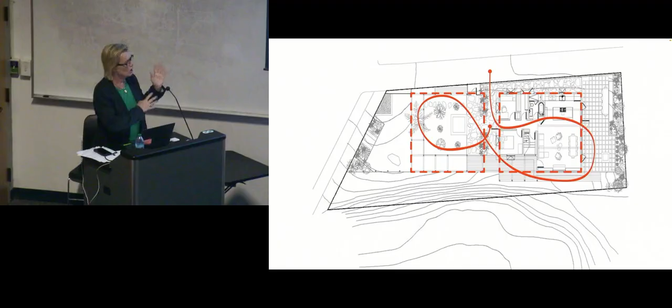The idea of it was just that the garden and the house were doubles of each other. They were the same footprint, and you could circulate in a party, or if you were a kid on a bike, you kind of circulate the same way, in and out of the house. But really, as a story, it ended up getting published a bunch, because at the time it was this, let's say, neo-postmodern something moment, maybe, where the idea of that shape kind of seemed to resonate.

And because of it, I got this amazing book deal to do a book of my choosing, which ended up being a book I worked on about, I would call it the alternative history of modernism in Los Angeles. 20 years ago, people still thought of modern architecture as kind of this Miesian, minimalism exclusively. But actually, the work of, say, Schindler, there's a drawing about Schindler done by Geoff McFetridge, who did the illustrations for the book.

Gregory Ain and a lot of other people in LA were doing these very interesting, weird shapes and sizes, a lot of stuff that inspired Frank Gehry, coming from this previous generation.

So I set out to do a book about the lived experience and alternative expressiveness of modernism in architecture, about the people who lived in the houses and neighborhoods. It was designed by this wonderful team from CalArts, Michael Worthington and others, who were into blasting apart conventions of Swiss modernism and graphic design. So it's super graphic, which at the moment was a thing, different now, maybe more common. That's kind of what started me off.

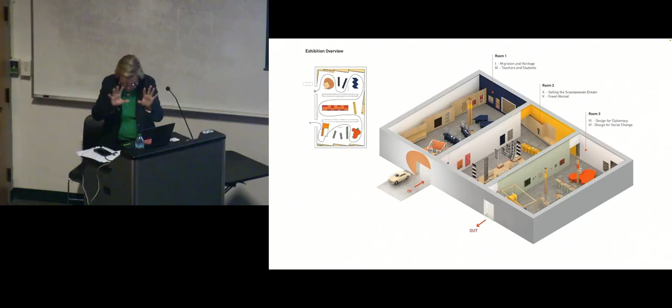They're like little models or some black and white drawings, a little photo here and there. So we wanted to create an immersive experience for people to actually hang out and feel like they were somewhere that they could study the objects more. We went back to the objects themselves to create this palette of color, of shapes, of textures, and materiality that literally became big features within a pretty blank set of 3 rooms in a gallery.

It's in the Renzo Piano BCAM gallery. This is just the stuff of laying it out.

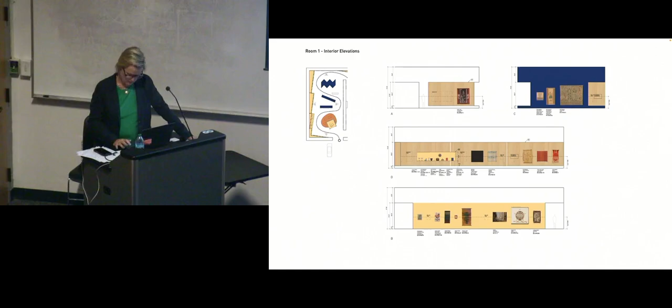The pieces start out with an installation of Greta Grossman's work. She was a Swedish architect in LA who ended up doing all these furniture lines, and her furniture is inside of this piece. That cutout is from the shape of one of her lamps, and then it's wrapped in a Josef Frank map of Manhattan that became a famous textile of Josef Frank. The shape of the platform she's on is also that same shape of that lamp. So even if you didn't notice it, you maybe absorb some of those shapes and colors and stories just from the experience of visiting the exhibit.

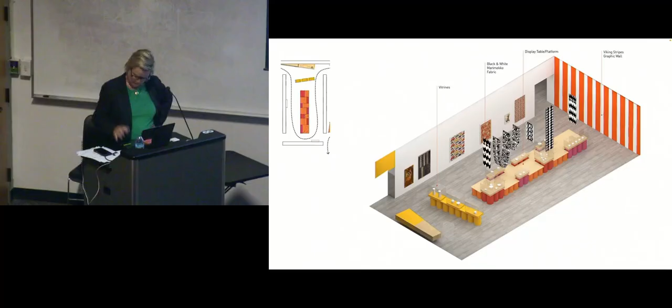This is the Saarinen section. That blue angle is from one of Loja Saarinen's patterns, which is on the wall opposite. The big pieces of wood throughout are kind of indirect Alvar Aalto references to Villa Mairea and others, but also just the wood export of Scandinavia being their primary export. This was an idea about another room that was about the marketing of Scandinavian work, setting it up almost like a Viking ship of products, with the Marimekko sails.

Anyhow, you can see also these are those same Sonotubes that were used in the LA Olympics. They had given us the freedom to make our installation of the show, which traveled around the world, like very LA specific, so we were kind of taking the LA way of doing that. A lot of, for me, context is really a big issue in terms of what associations you can get your multiple readers or multiple viewers to experience.

So that's that show. Along those lines, using relatively inexpensive means, color and pattern and maybe shapes that aren't too elaborate, we did an adaptive reuse of a factory building in Los Angeles for the Silverlake Conservatory of Music, which was a music school started by Flea of the Red Hot Chili Peppers and is an after-school music program and summer camp that's hoping to fill the gap of the underfunding of music education in LA. They had for a long time this little tiny space down the street, and it was actually in that Bohemian Modern book, which is kind of how I got to meet this gang.

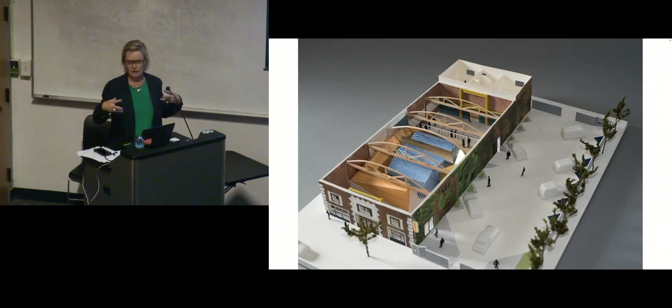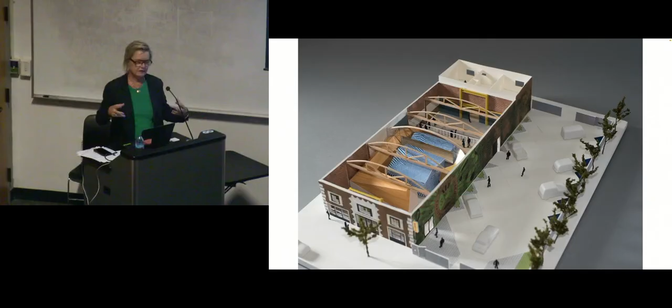So they wanted to—we took out the front and added all these windows and openings, but then it's like a lobby here in the front, a very informal, low-key lobby for parents and teachers and stuff to hang out in, and then it turns into a little village for students. So this is that lobby, and then there's a kind of...

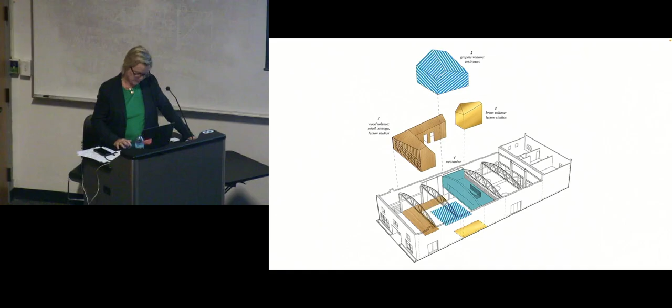A set of practice rooms, where all the classes are, like little rehearsal rooms set up in a kind of Dr. Caligari-esque little streetscape for students to walk around, sort of scaled to the kid. And then in the middle of it all, we have a pretty big assembly space, and our codes require a huge, ridiculous amount of bathrooms as a result. We didn't want to choke off the connection between the school and the assembly space.

So that continues to be a really great community space. It's actually where I met another client from another event there.

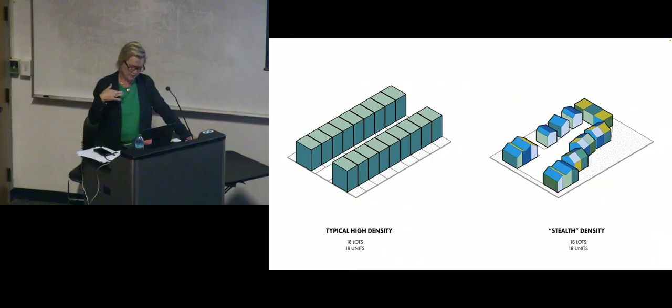We were asked to do something more appropriate to the site, which is in Echo Park on a very complicated hillside. We came up with this idea on the right that helped break it into pieces, where instead of looking like 18 separate little boxes, it was kind of a community of 8 or 9 houses, or 8 or 9 buildings.

So many of the houses, things that look like houses, are actually 2 or 3 full houses disguised in the shape of one. I was calling that idea stealth density. It's also built around a landscape courtyard - a very designed courtyard that is where the parking is, but is also the space of community. All the units face into that space, but they also have front and back yards.

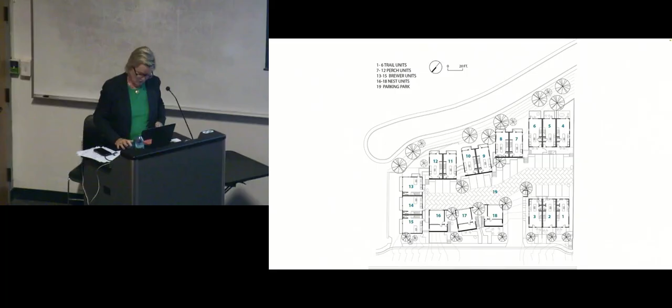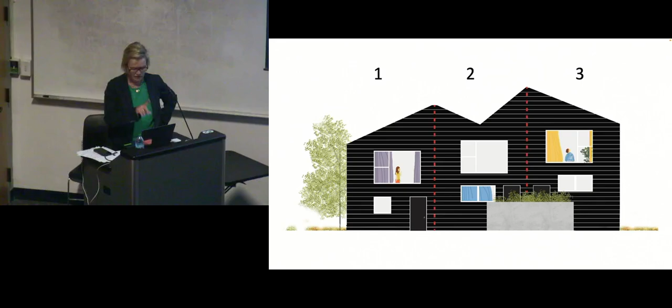So these are some rough models, Iwan Baan pictures, showing the Richard Scarry-ish version of life there. This is a triplex - 3 houses that have a 6-inch space between them, and then a roof that appears to continue, but they're actually separated by gaps.

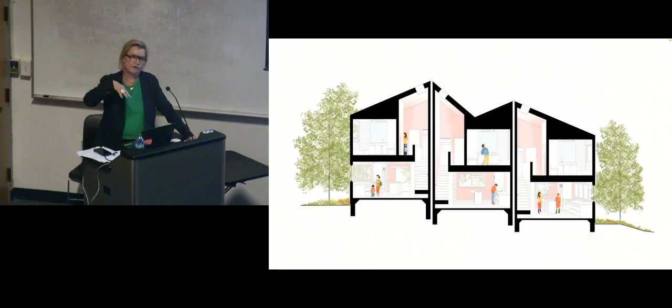The other thing is that by using that kind of shape, leaning into the gable world, it allowed us to create a lot of different sections that really increase the spatial differences and breathability of these buildings - much higher ceilings in the staircases with indirect light, and different ceiling heights in the bedrooms accordingly, hugging the sites.

This is a staircase that's also an office and also a laundry room. We used these big industrial window types - I think we saved like $490,000 on the original bids by switching to full-on storefront systems, which made it waterproof but gave you these much bigger expanses of glass. Pretty good for the views.

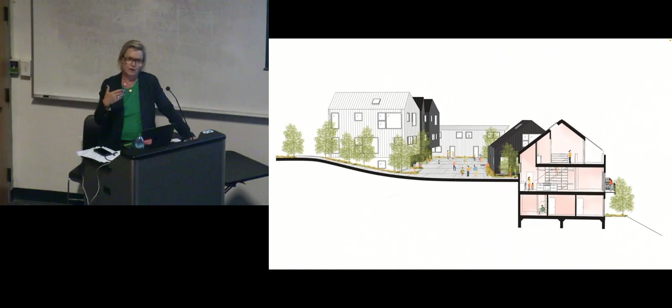There's also two different types of materials - some of them are fiber cement board painted black, some are standing seam metal and white kynar. That language between them helps make it feel like more of a set of unique things rather than just a mono concept project.

There's a couple of single family houses in it too. One architecture critic kept calling it the emoji face buildings because of this stuff, which is true, I guess.

It kind of goes from site to site. They're also staggered so that you can always see above the other ones, and everybody gets these pretty great views of downtown. This is all grown in now with trees and things, but I have no updated pictures.

The really fun thing for me was that in terms of building a community that fit into the larger context, people in this small community have started having communal parties and dinner parties, and that central courtyard has been getting used for other purposes than parking - that was always the sort of Dutch and Japanese idea of parking that's also other things and adds to community building.

Along those lines, in terms of ideas for housing, which maybe are somewhat specific to LA, but we have a housing crisis, you may have heard. There was a competition about smaller scale density, or medium density, low rise it was called.

I thought I would do a project on a site I know really well in Frogtown, where I did my thesis when I was younger - a piece of land next to the LA River that had small worker housing on very, very skinny but deep lots.

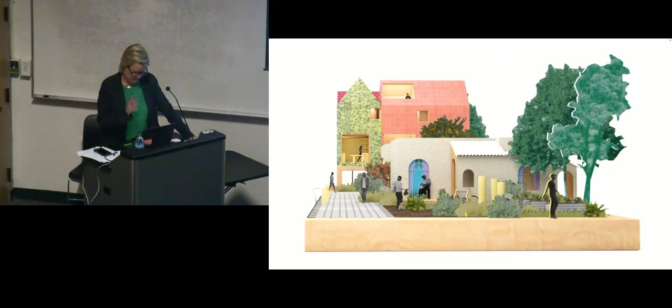So this is the bigger concept of how that might go, and this is an illustration of our idea, which is really 4 almost Blackbird-y projects grouped together around a central core, and also set down in the ground for passive cooling as well as height.

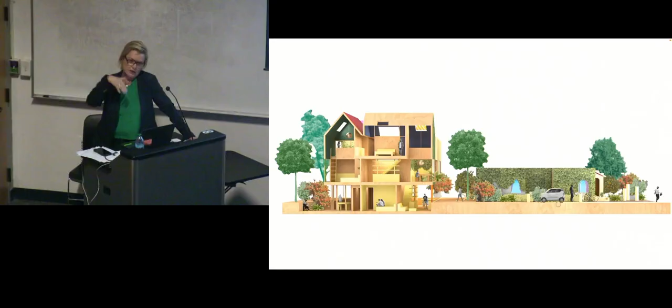So we made these winding, multiple stairs that were kind of winding up through the middle, and that's also acting as a ventilation stack for natural cooling.

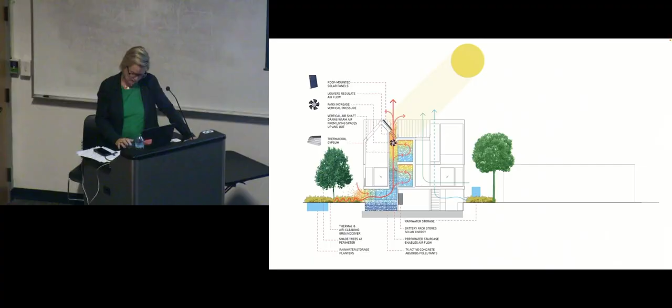There's a fun model. On the other scale, we did another project that was also hypothetical for much denser housing. Another thing about Los Angeles is that we haven't really built a new street since 1992 in Playa Vista, because our planning department is maybe not the center of progressive planning, I would say.

So we took this site that used to be train yards - right now it's housing, was sold and not bought by the city like 20 years ago - and now it's just a bunch of FedEx warehouses and warehouse buildings and a sea of parking.

So the idea was to heal that wound and use this idea of stacking the commercial parts of it, which are really vital for the tax base of a community, vertically, and then leaving the rest open for housing. That's kind of what these diagrams are.

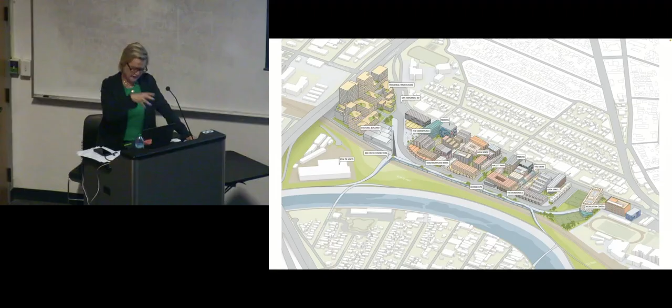Just imagining what that might look like. I was a little bit interested in Eliel Saarinen's ideas for Helsinki, which are quite an amazing set of drawings - would you care to check it out? They have the European block idea, but also in this case there's these sort of separated parking stacks, so we were drawing different ideas around that.

Here are some renderings. So all the higher bits are stepped back from the street, so there's a streetscape that connects to those parks.

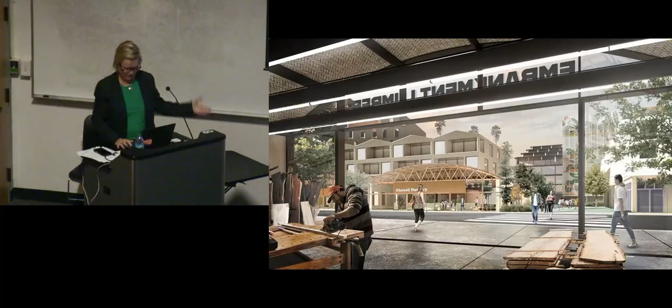And then, let's see.

So beyond housing, I guess the way that Blackbird has that concept of stealth density and hiding things, I think it's really great to be able to find a concept that's readable to your average person, not just architects, in terms of why something is what it is.

So one of the projects I had recently, an ongoing project, is working with Sunnylands, which is a big famous compound in Rancho Mirage in the desert, designed by A. Quincy Jones in the late 60s for Walter Annenberg. It's like where Obama goes golfing—it's the Camp David of the West Coast, basically. They use it for political retreats.

This is the main house that was done by A. Quincy Jones, and it's now sort of a museum, but it's also where they have these retreat functions. A. Quincy Jones was toward the end of his career, and he got a little bit arm-wrestled into having to make everything pink by the owners.

But they had also all been spending time in Mexico. This is right when the amazing anthropology museum in Mexico City was done, and there was a bit of a craze. So there's a lot of stuff around Rancho Mirage that's inspired by late 60s modernist Mexico that translated into Palm Springs, painted pink. There's a whole thing around shapes and forms—this literally is a pyramid taken from that.

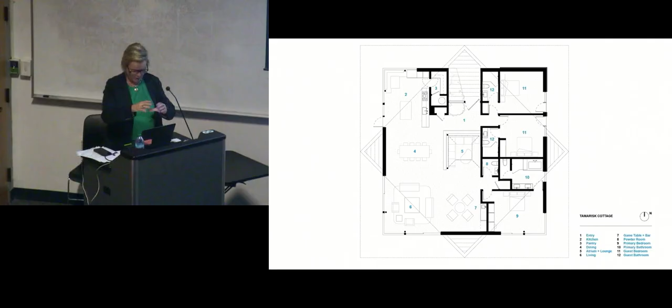So let me just get to the project. This is the framing of that project—these huge overhangs, the underside of which is going to be painted pink, and the top of which is reflective white.

But the concept really drives the project, obviously, and it got connected to this other structure behind it, which is a swimming pool and pavilion done by Fred Fisher recently.

So this is our building, recently finished, not yet properly landscaped. And this is the context of Rancho Mirage, which is near where the Indian Wells tennis thing is, if you know that kind of thing. And this is the house—I think this is a rendering, but there are pictures too.

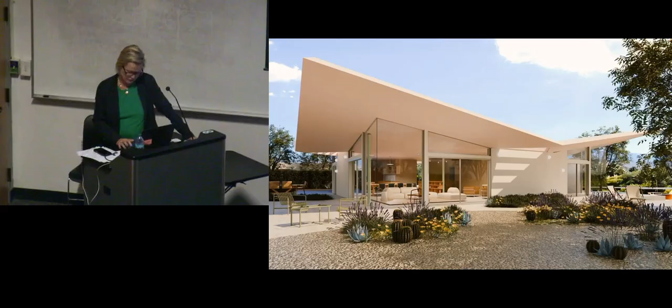Landscape is a big part of this because it's very indoor-outdoor. If you've been to Palm Springs, there's a famous Albert Frey building that was, I think, a gas station—now it's the tourist information center. I always loved the daringness of those giant overhangs, and I didn't know if you could get away with doing it, but you can, by the way.

It's not the hardest thing, and we had to chamfer the edges with these extra bits to get that line to thin out and read in a disappearing way.

Say no more. We also, in the middle—the famous thing in the Quincy Jones building is that it has this big atrium in the middle that's kind of great, with weird plants in it and these pink columns. So we took tropes from that, like the pink columns relating to it. We made an atrium, although it's actually got a skylight on it, and it becomes this little corner built-in nook.

Looking through that window, we actually see Quincy Jones's own studio, which previously had been an addition to the ranch house that used to be there. So that was one of these sort of high concept moments, but then, of course, most of the decisions are more about the architecture itself or the project itself.

Another project in Silver Lake is a house next to this house. Originally, it was an addition to this house. This is a Raphael Soriano from 1936, in the heyday of streamlined modern meets high modernism. It's an extruded kind of boat shape with this really great round window for a piano, and our site now is where that arrow is. So we wanted to keep that view clear, but we also were looking for kind of a language for this house.

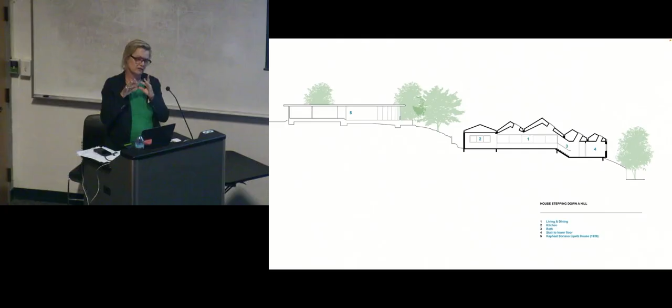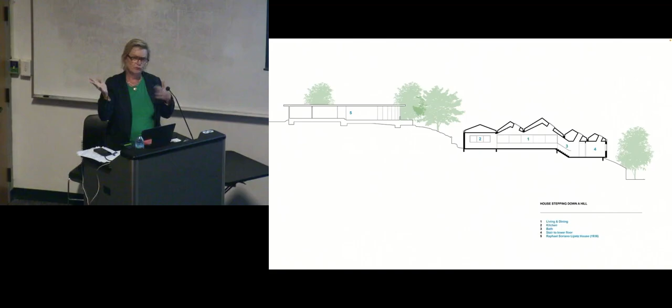Also something new in my bag of tricks in terms of stealthiness, I guess, is starting to use scissor trusses. They're an amazing way to save a lot of money on the framing, but they also let you do any kind of shape on the inside that's not necessarily related to the outside. So you could have crazy shapes on the inside, a very simple outside, but you can also get all your gear, your HVAC, et cetera, running through it. And they go up in about a day, so you frame your whole roof very quickly. It's actually very economical, but also very custom.

I was working on Silvertop at the time, the Lautner House, and I called this the poor man's Silvertop. So all kinds of strategies around wood framing.

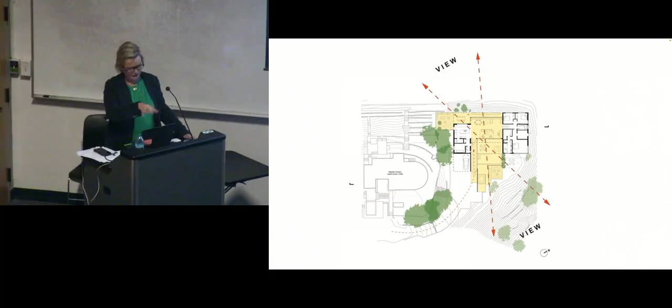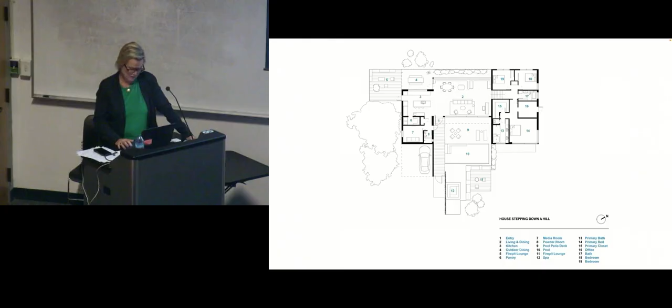This is that house itself, sitting below their house. It also has these views in both ways, one towards the ocean, one towards the mountains. The big goal was to keep the main floor pretty much open as a sort of pavilion zone, so it could feel like a pavilion with these views, and also steps down the hill for outdoor functions. This isn't really showing the scissor trusses well, but the next picture shows the scissor trusses inside. Look them up.

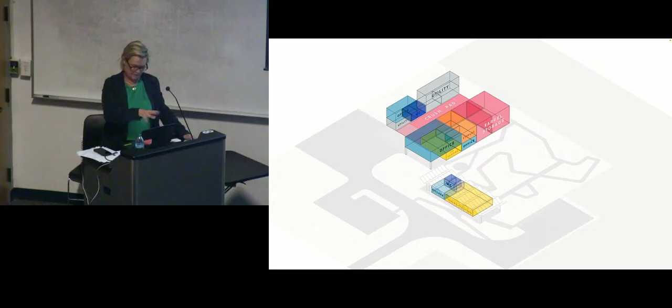This is that tasting room, separated stage. It's incredibly hot in Napa Valley a lot of times. You actually need these shade structures, and you have sprinklers in them and so on, so you can kind of constantly cool off outdoors. Our landscape.

This is that altered, sort of prefab, very inexpensive metal building with some alterations as a crush pad in it, for wine storage. And underneath it is a sort of VIP lounge tucked inside and outside. There's a lot of events at these wineries.

And yeah, it's been super successful actually. It's one of the big new wineries in town because the owner also wanted to have younger people interested in going there, to give it a more with-it atmosphere.

So a new project we're doing that really gets going in January is for this artist, Lauren Halsey, who has a nonprofit called Summaeverythang. She's famous, maybe you know her project on the rooftop of the Met a couple of years ago, which was this monument, almost an Egyptian monument to her neighborhood in South Central, but done in these giant white panels. That's actually getting installed right now in LA on a public site.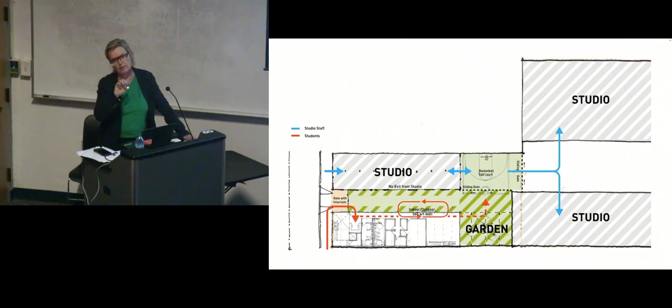So we're building a structure that also has a big garden oasis, but it inhabits a little bit of the existing building, and then we cut it off and build our new larger structure behind it. The idea is to have a big public space as well as classrooms for art, music, and technology.

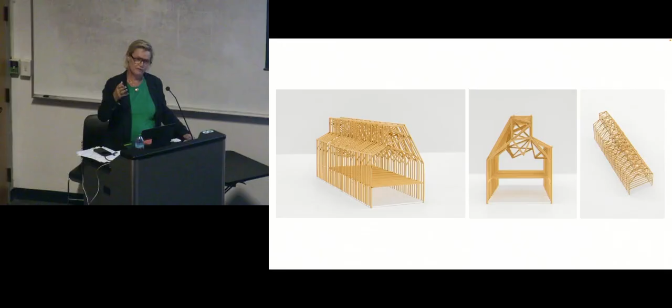There's some interior views, but the structure here, the idea was to take a shape that was sort of an exaggeration of an industrial shed, kind of a sawtooth profile, and then use that to fit our two stories and one double-height space inside of it, while creating different kinds of rooms inside. So this is almost an anti-scissor truss, because we're creating shapes that are like negative space out of it.

And then lastly, I just want to show a couple of houses. This first one is in the wake of the Palisades fire. As you know, Palisades and Altadena both burnt terribly. I have a project in Altadena as well, but I just wanted to show one of these projects that are part of a group of people trying to rethink the case study program from the late 40s, building ideas.

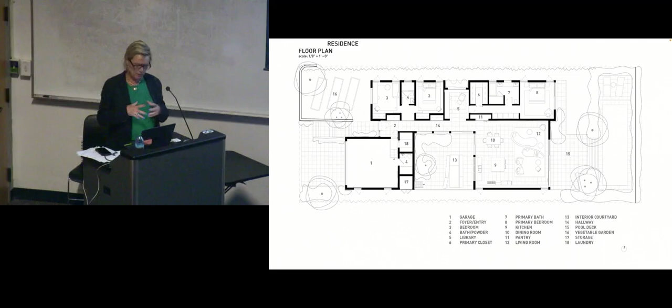Building ideas of how to build modernism for people in general through model houses. And so we have a project that in plan kind of takes a lot of those case study ideas of the inside and outside as a 1-story project. We have a courtyard, we have an existing pool—like everyone's house burned down, but not their pool. So the pool's there, and then the idea is this sort of corridor that weaves through and has a lot of transparency around this courtyard, so we have like a kind of indoor garden and 2 outdoor gardens and bedrooms strung along.

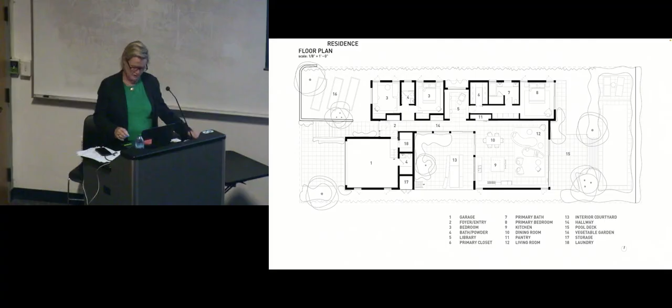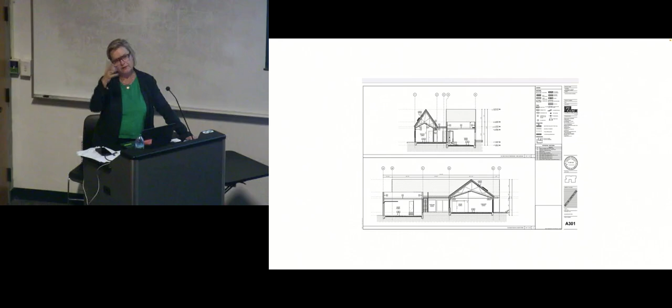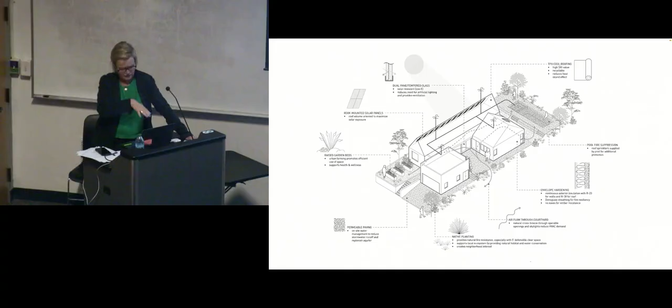So rendering of that—this one keeps changing because it's still under design, and it's going to start DD soon, but this is kind of the latest of this project. I'm excited because it's so case study, but then not.

Another project that we finished recently is a restoration and huge addition to a house by a student of Frank Lloyd Wright named Foster Rhodes Jackson, who is, I would say, extremely eccentric. He went to Taliesin for a while, not sure how long, moved to Claremont, Pomona—Claremont in the Pomona Valley was this huge crafts and kind of art center in the mid-century era. There are a lot of ceramicists, Sam Maloof the woodworker was there, and actually a few Lautner houses around there, kind of clustered around the Claremont colleges.

Foster Rhodes Jackson had this one client, the Hasifs. This whole family kept commissioning him to build these houses, and this is the original drawing for this house that we worked on—very early Taliesin. Although these drawings, like that drawing we're looking at, is from like the late 50s, which is kind of amazing because it's supposed to be from 1925, I think. But anyhow, this house turned into one of those ongoing projects between the architect and the owner, and then also the owner and various handymen, for a really long time—from like 1960 to...

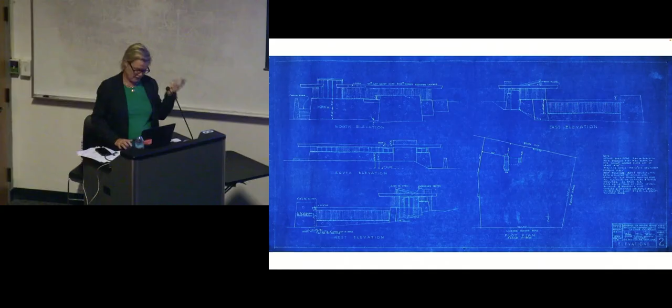1998 or something, it just kept getting added onto. And when our client bought it—he passed away—they thought it was all sort of real estate, like 9,000 square feet of real estate. It turned out that only maybe half of that had ever been permitted. Half of it didn't actually have foundations, it was completely moldy and falling down. So we had this really interesting project of kind of restoring parts of it, fixing things, and then building new things where things were unsalvageable.

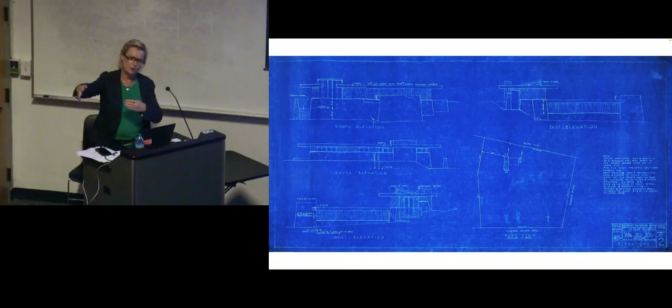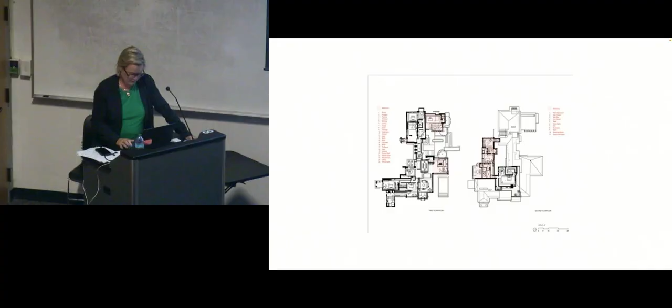So it was this really long interactive relationship with Foster Rhodes Jackson, and he's got some writing as well that was kind of interesting. So here's sort of a vision of what it was, let's say circa 1970 or something. And this is an illegible map of the new parts and the old parts, but the pink is the new parts. But this is what it looks like now—we built a whole other line of building in the back that I'll show you, and then these are some parts in the front that are restored, and some of them are just reimagined.

This was just an architectural digest, that's why I have really fancy photographs of it. But it's kind of amazing because one of the things I love about working on Wright houses, I love also, but it happens sometimes in the Schindler houses, that there's just a lot of inventive design at the micro level as well as the macro level.

And sometimes it's like an entire idea of window systems. In this house, there's this folding wood screen that happens constantly in the old part, that we ended up using as the exterior of the new part that we were doing. You can find a whole language from the original architect to work with to make other parts of it. Not that we want to make things that look fake like the original architect—we want to make things that are distinguishable as different, but still related in terms of tone and atmosphere.

This is actually on the right, it's a new wall by us, but this is the Saint-Malo staircase. I'll just show these nice pictures.

So this room has a ceiling that's actually like a kind of plexiglass skylight that was in another one of these parts that was illegal and we had to take out. So we kept that and turned it into a light fixture, and put it into this dining room that we made with this folded pattern.

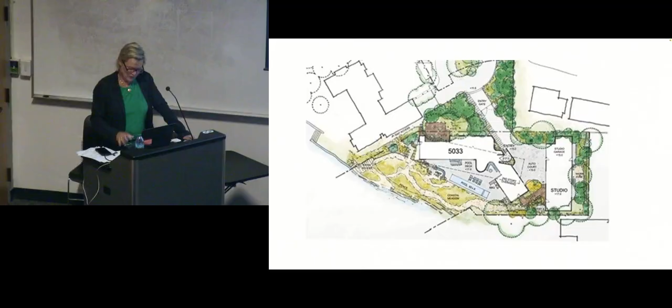We're doing an art studio as well as a new house. In plan, the art studio is on the right and the house is the middle part. It's also adjacent to a house that the client owns, which they're going to turn into a guest house.

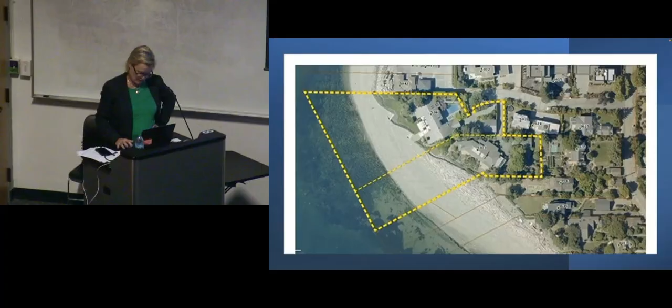This is the exterior, currently not quite finished. And those are the sites. So in the plans, the studio's on the right, an art studio and garage, and then the main house is...

Sort of three bars, but the entryway is meant to be this very organic kind of knuckle joint that has a big staircase in it, but also brings you in with views out and indoor-outdoor sort of spaces in a more organic way, and then clarifies into these different wings.

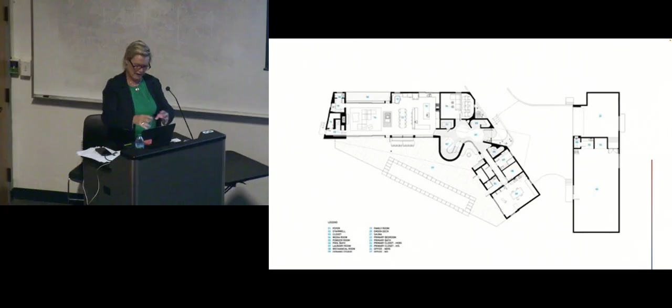And the second level has that piece, that curving staircase, which is clad in green tile, and then that also has an indoor-outdoor kind of front and back upstairs living room.

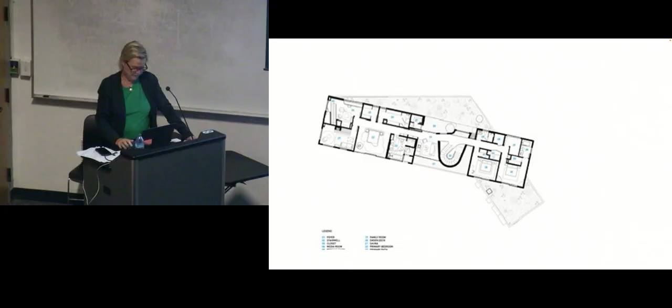Partially the wood—one of the clients' goals was for us to bring a kind of California idea of color and openness to the Northwest. I looked at a lot of their AIA awards, and everything's like blackened wood, or whatever it is, shou sugi ban or whatever. So this is meant to be light colors and light wood, kind of cheery in those dark Seattle winters.